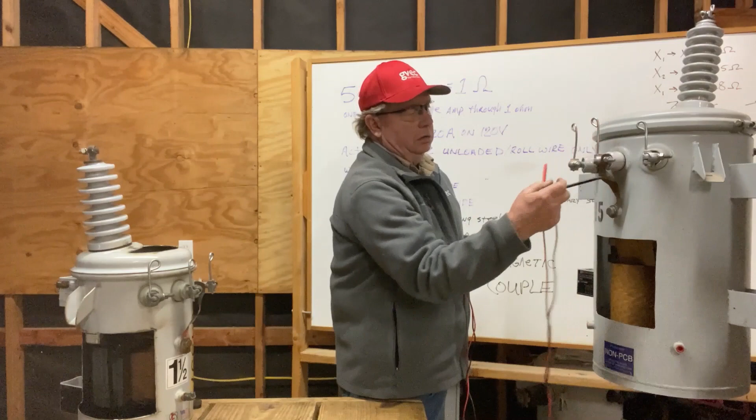You can see that we went across the coil and the center tap, ground straps on, but the secondary coil is isolated. Here's the transformer that we know is bad. X1 to X2, 0.6 ohms. I want to do X2 to X3, 0.1 ohms. And then we'll go across the full coil at X1 to X3 and we read 0.6.

So using a digital ohm meter to determine whether your transformer coil is shorted is the wrong way to do it, in my opinion. This transformer, we know, blew the high side jumper out. And a test from here to case would show you open. You already blew the fuses, so you're taking that pot down, but if you were doing forensics, you could try to determine what happened.

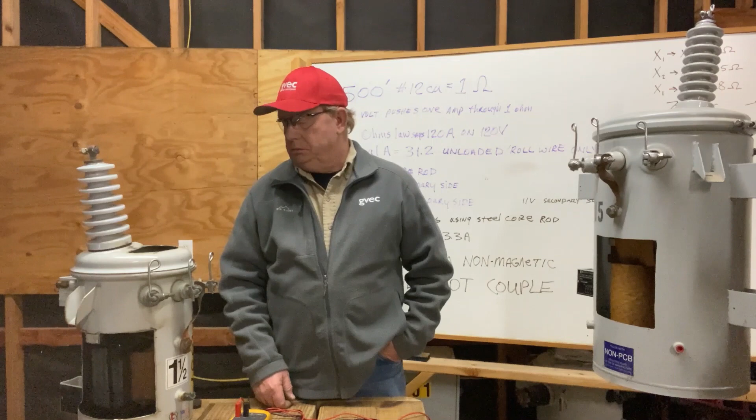We keep this one around for a little cutaway to see how the transformer's put together. And the correct instrument for that type of winding resistance test can cost you $20,000 to $40,000. It's not going to be the same as my $500 Fluke 87. There's other ways to do that.

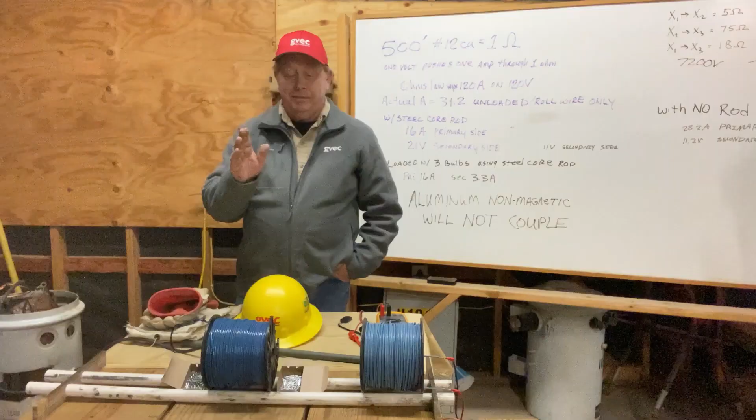In a minute, we're going to set up here and we're going to talk about winding resistance and how the transformer works. But give me a second to set this table up and we'll be right back. All right, we're set up to demonstrate the next part of this lab, this video. And what we want to do is show magnetic coupling. That's how the transformer is going to work.

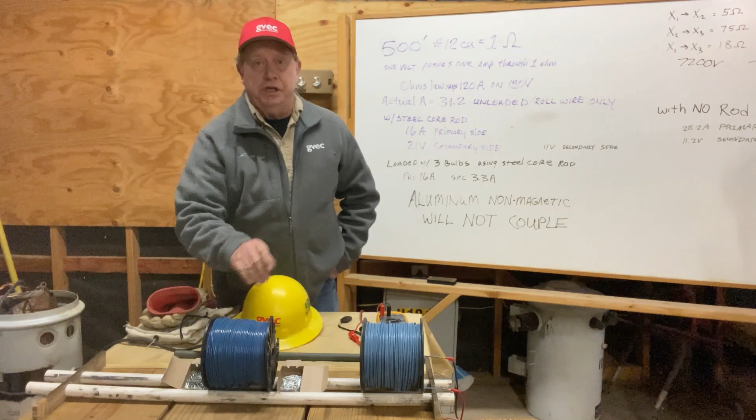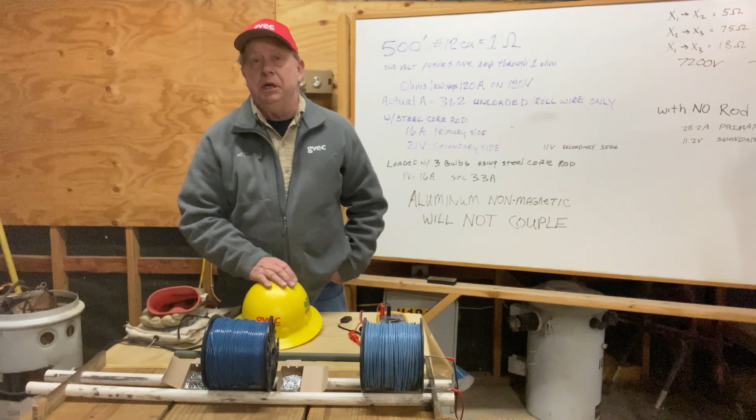In this demonstration, we have a 500-foot roll of number 12 copper that we're going to use as the primary coil. We have another roll, 500-foot number 12 copper, we're going to use as the secondary coil, and then our core will be this steel rod. When we measure resistance on this roll, we come out at 1 ohm. And using Ohm's law, it would say if you were passing DC across it, you would pull 120 amps. But because we're going to apply AC, 120 volts, this roll will become an inductor and will bring an impedance beyond just plain wire resistance.

I put a couple boxes of paper clips here, and you're going to watch when we energize this coil. And usually young men say, when you energize this, you're going to trip that 20 amp breaker. I say, okay, let's see. So we plug it in, you start to hear this vibrate, and you watch these paper clips jump out of the box, literally jump out of the box. This becomes the high side coil of our transformer.

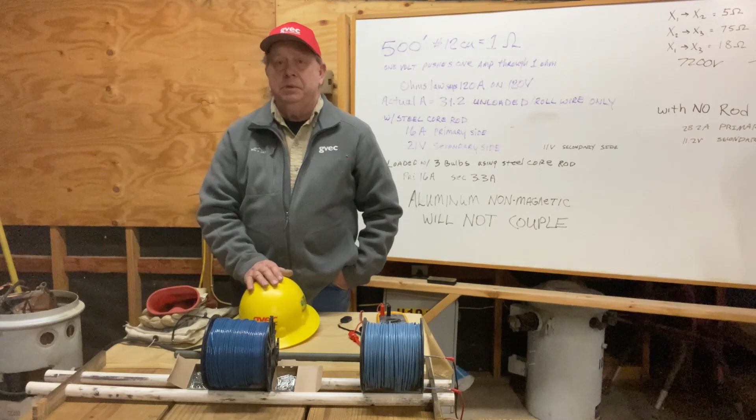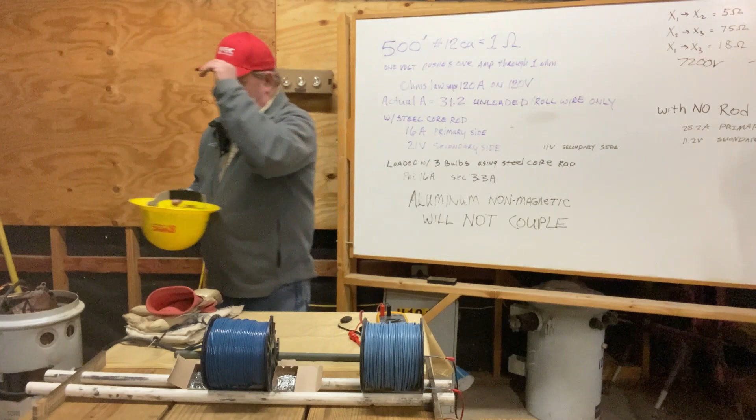So in a lab like this, what comes first? Safety. So we have a hard hat as part of our uniform. We have our rubber gloves that we're allowed to use on 120 volts. And then we have our protective eyewear. So give me just a second to set all that up, and we'll be back right here. Okay, hard hat, eye protection, rubber gloves, 120 volts. We're going to energize this coil.

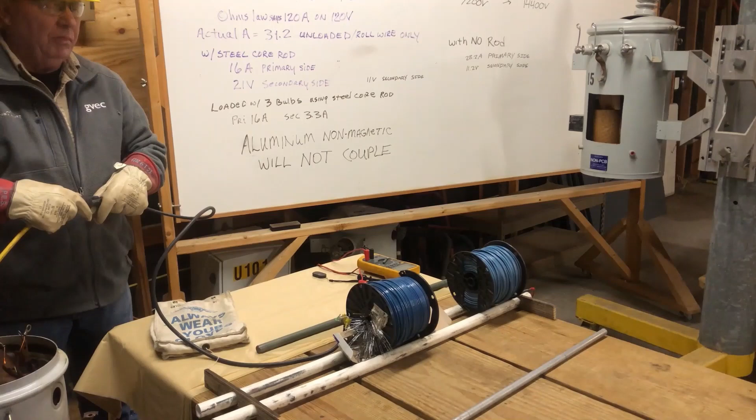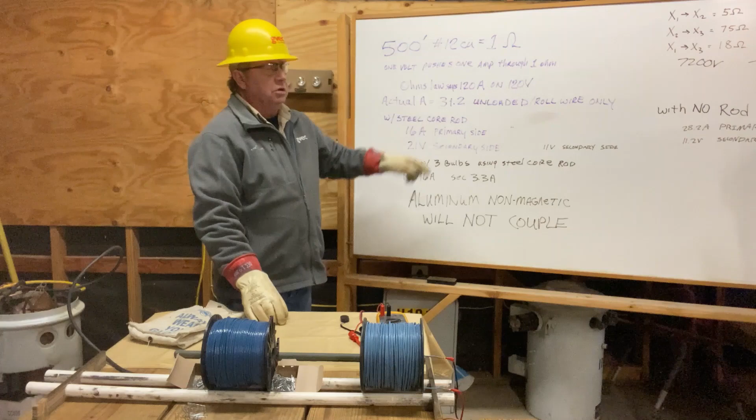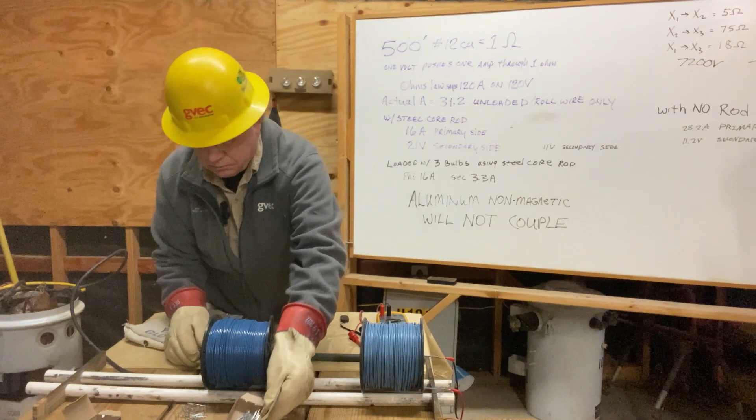When we measure amps on this coil, unloaded, roll of wire only, it pulls 31 amps, not 120. So now we're going to move these paper clips out of our way. And we're going to pull the secondary coil near the primary coil. There won't be any core, and what you'll see there is pure induction.

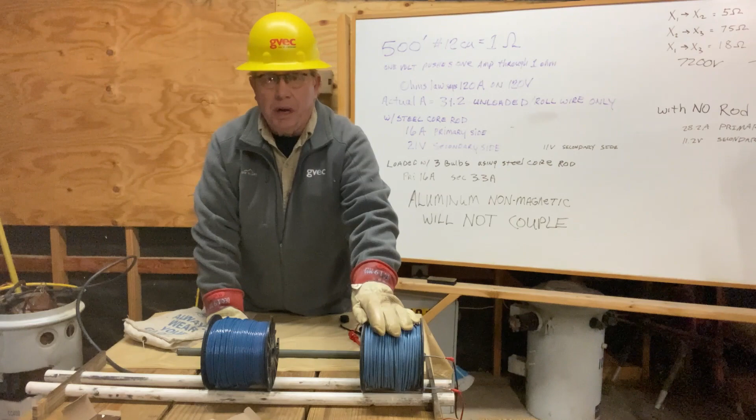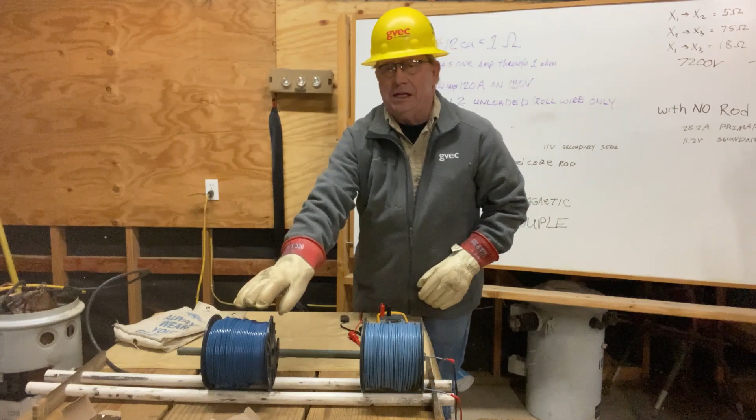Now behind me I have 3 light bulbs, and I'm going to try not to block those. They're tied to the output transformer right here. So we'll energize this and then start pushing the secondary coil toward the primary. And you'll begin to watch those bulbs burn from pure induction.

So you can see the light bulbs are burning. There is no steel core. We're taking this magnetic field, and because this one is so close, we're just inducing this to the secondary coil. Let's see how much air gap we can put in it. Just an inch or two.

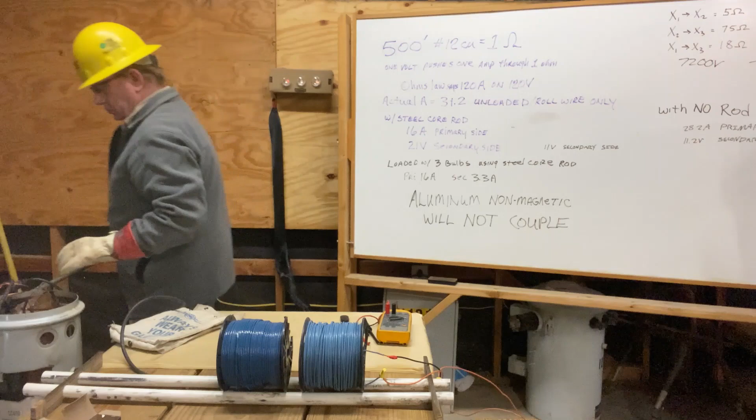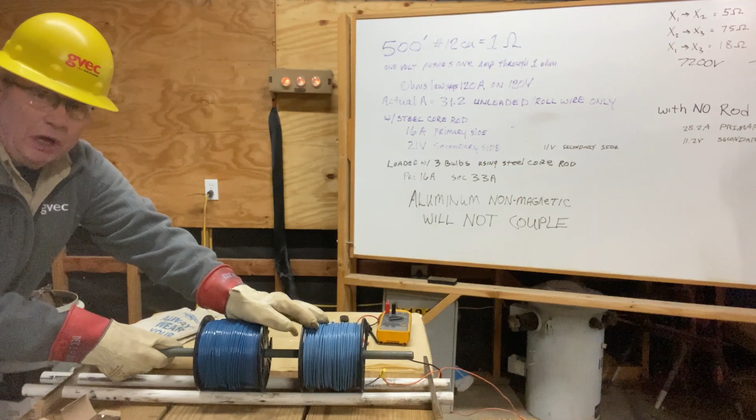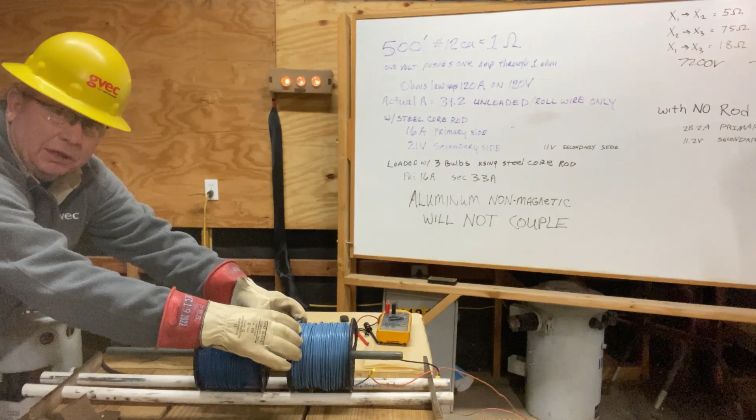Okay, right now we know what's happening is we're coming from this magnetic field into the steel bar into the secondary coil. Now we're going to close the air gap. Now this is a very poor transformer, very poor. This steel rod is getting red hot on the inside. Red hot. This energy loss from eddy currents and just core losses, call them what you want. This rod is getting into hundreds of degrees, and I'll insert a thermal video showing that.

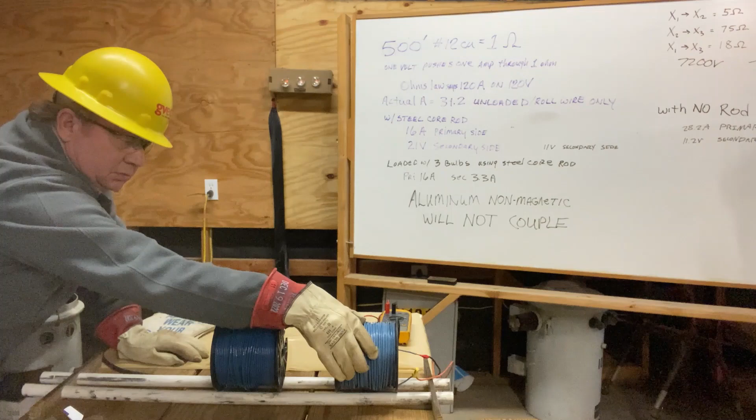So right now I'm going to disconnect this transformer. The thermal camera will show this rod. Right now it is too hot for you to touch in the area where the primary coil was located. We're going to push the secondary coil away and stop that induction. The primary coil is still energized. And we're going to disconnect the transformer.

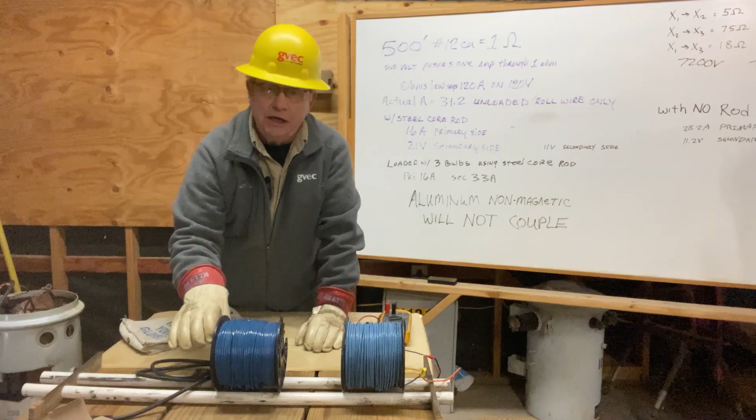So this is easy to do. 500-foot coil of wire, 500-foot coil of wire, 120-volt cord, just end to end, black and white. We tie this to our load. The output with this very poor transformer is about 40 volts. So when you saw those light bulbs burning, that was 3 12-volt bulbs in series. So when you saw them get real bright, as soon as I got them close together, I was probably producing about 40 volts.

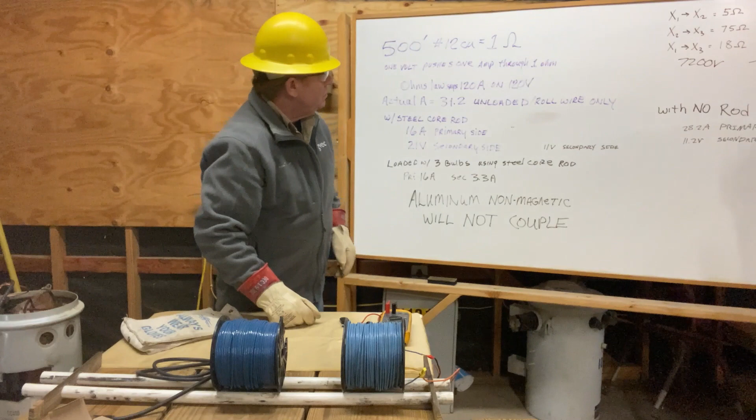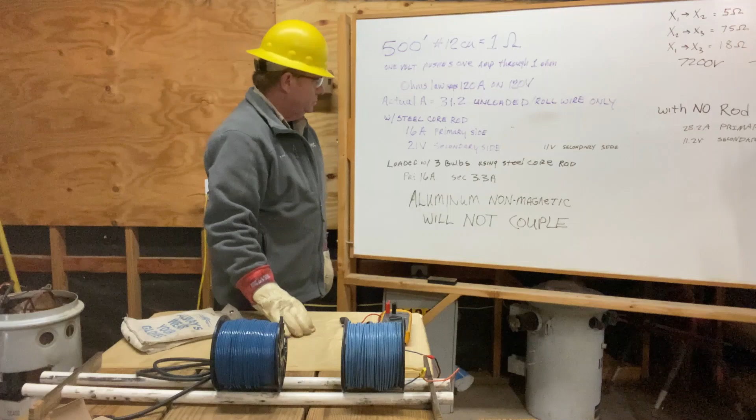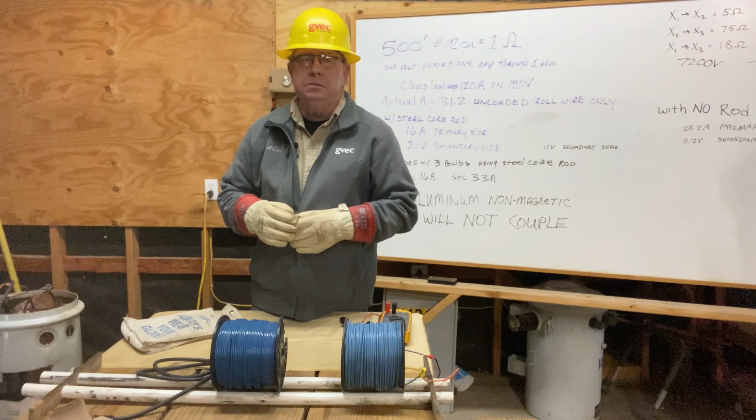When we loaded it with 3 bulbs, the primary had 16 amps on it, and the secondary had 3.3 amps. Remember, these are 500 footers, so on paper they were 1-to-1 ratios. The next thing we're going to do to show you that this was a magnetic coupling is we're going to use an aluminum rod. We're going to replace that steel core with an aluminum core. And because aluminum is non-ferrous, we won't see it work.

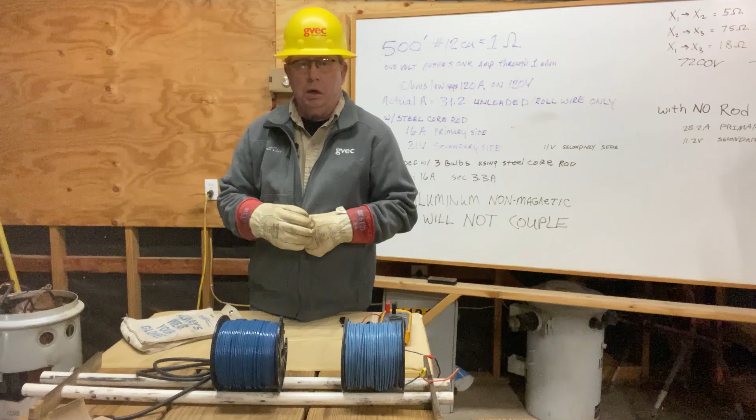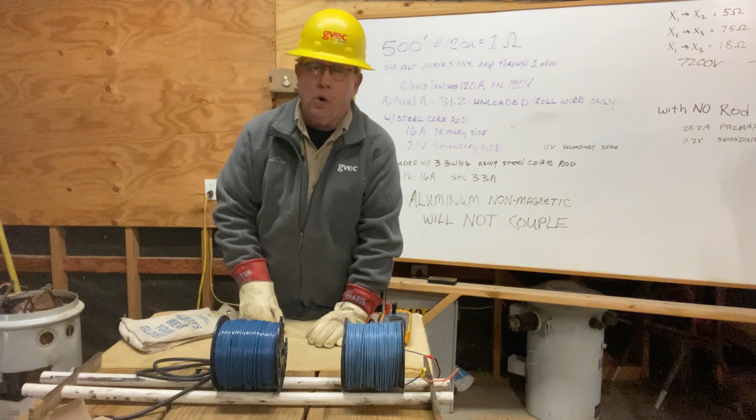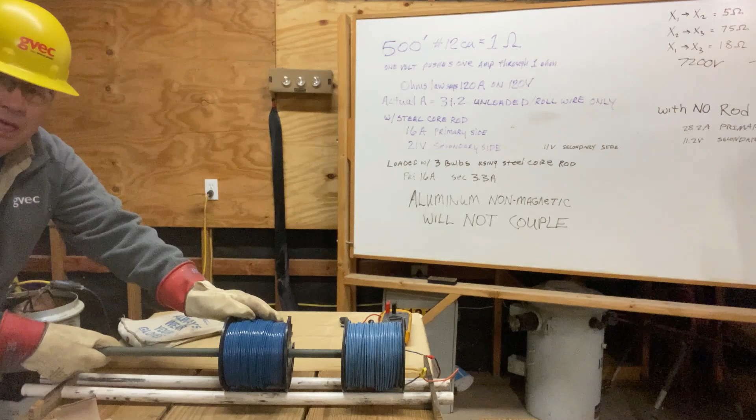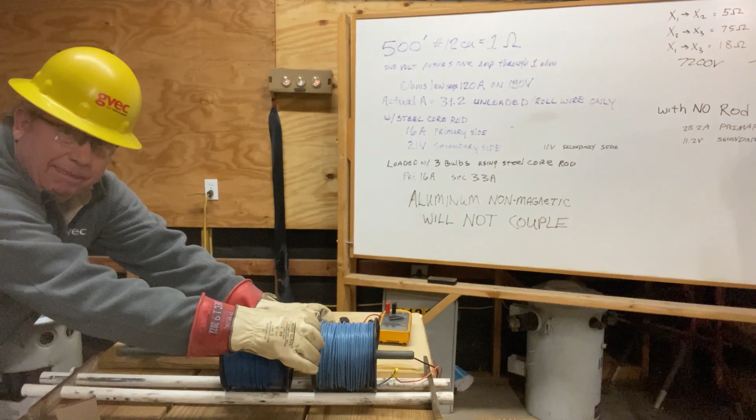So I'll re-energize this coil, put the steel core in, make the bulbs burn, pull the steel core out, insert the aluminum core. Nothing's going to happen because the aluminum cannot create the magnetic coupling required to energize the secondary coil. High side transformer is energized. Steel core gets inserted. See the bulbs burn. Air gap I got right there.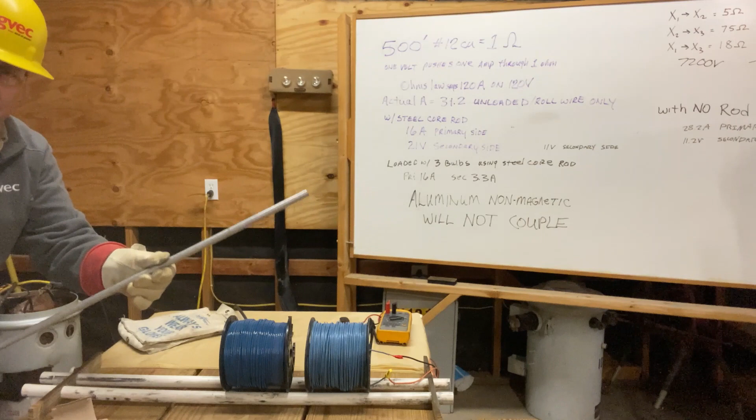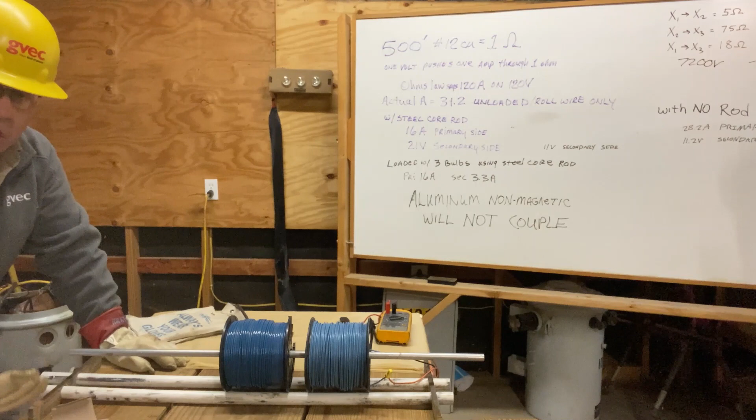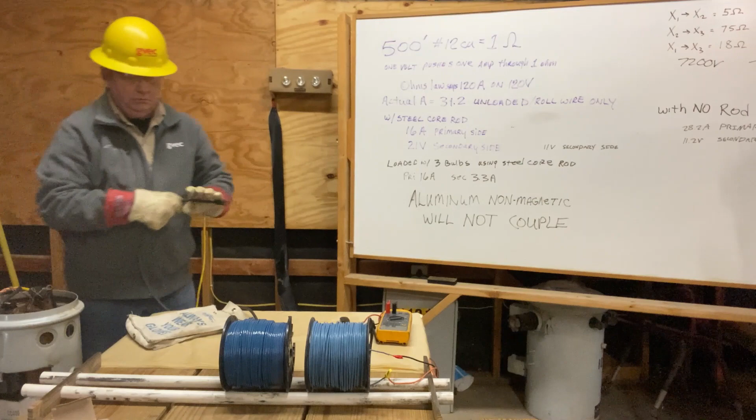Now I'm going to remove the steel core. Now we're going to install the aluminum core, the non-magnetic, non-ferrous material. There's no light bulb, there's no attraction from this high side coil to the aluminum rod. All right, we have everything disconnected.

And I think we've done a pretty good job of demonstrating the magnetic coupling that's required to make a transformer operate. We've talked about the inductance that occurs when we energize this coil. It becomes an inductor. And then as we get this air gap, so when we talk about induction out on the line, how much current's passing through the wire? How close are you? How long does it stay parallel? There's quite a few variables, but the part that you've seen here is that the steel is required.

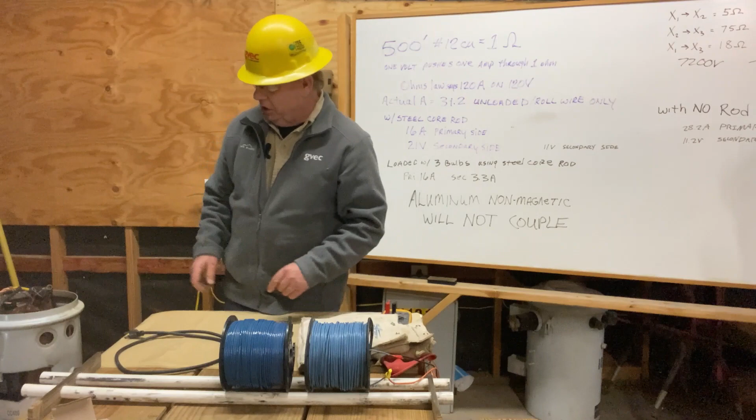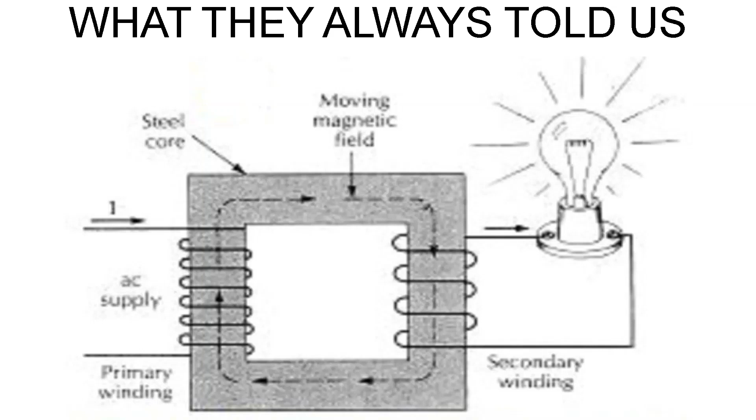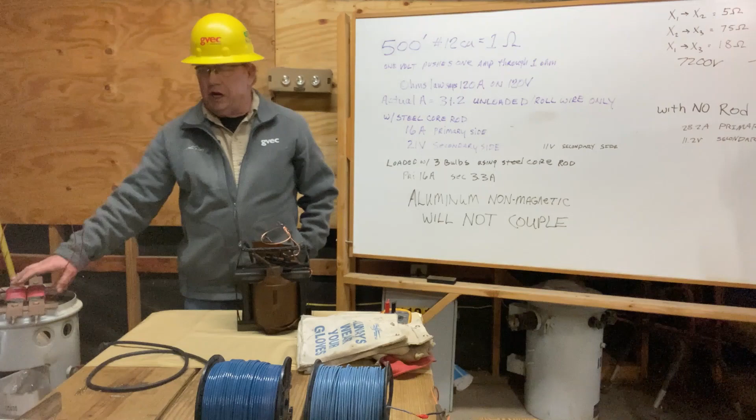Now, I'm going to lift this transformer coil out of this burned-up transformer and show you. This transformer doesn't look like our transformer. When we're learning about transformers, we read through the books and we see this square coil and there's wire on this side and wire on this side, and that's very inefficient. Here's a transformer coil that I built, 2-to-1 turns. It's so inefficient, it creates so high currents in the coil, it won't run on a 120 volt circuit.

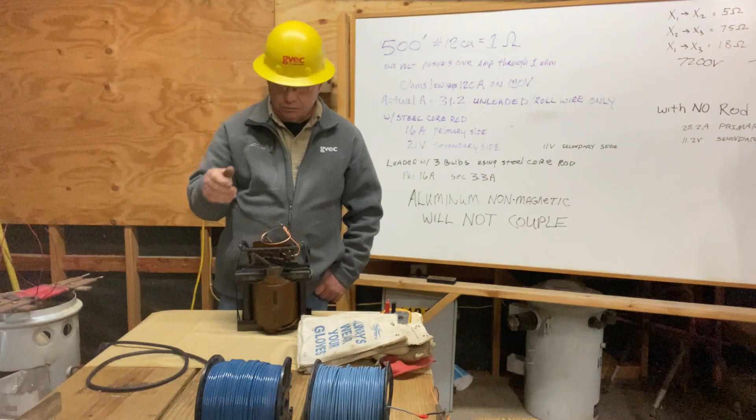All the manufacturers are trying to build an efficient transformer. They're using laminated steel core plates here, but the secondary coil and the primary coils are actually wrapped around each other. They're not separate like this. Wrapping around each other increases the efficiency. There will always be losses. We don't have a superconductor, and we're going to see core losses, iron losses, and until they can create a core material that's better than this, we're going to continue to see that.

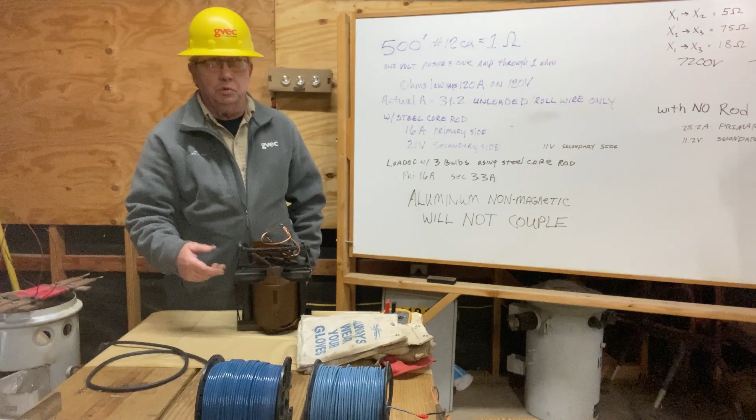We'll see eddy currents, we'll see losses, and right now, of course, this one's burned up. It's a little dirty, nasty. We cleaned it up the best we could. But it's nothing but wire around more wire. And until it's energized, it's just wire. If we ran it out in a straight line, it'd burn up. There would be no magnetic field created.